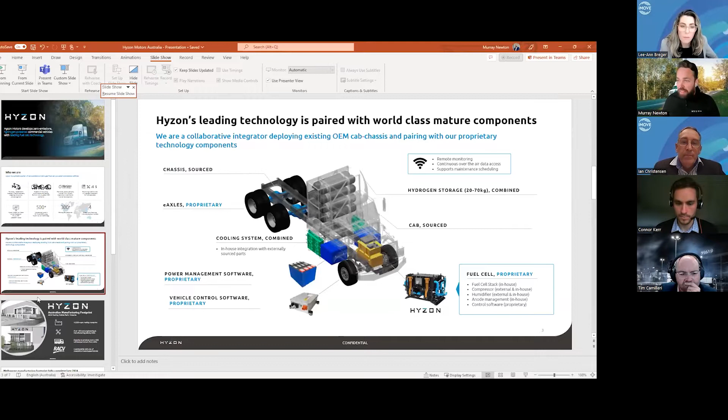Murray, sorry to interrupt, I don't think your slides are going through. I sent you a message but it doesn't seem to be advancing. Do you want to hop into full screen mode and go through? I will, sorry about that. Can you see that now? Yeah, that's going through now. Okay, so I can make the presentation available for people afterwards.

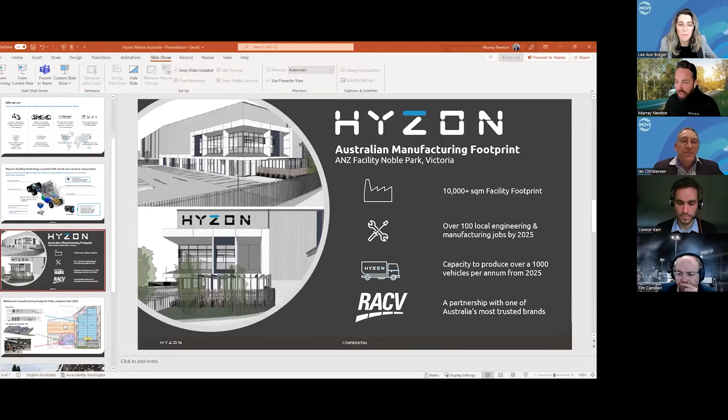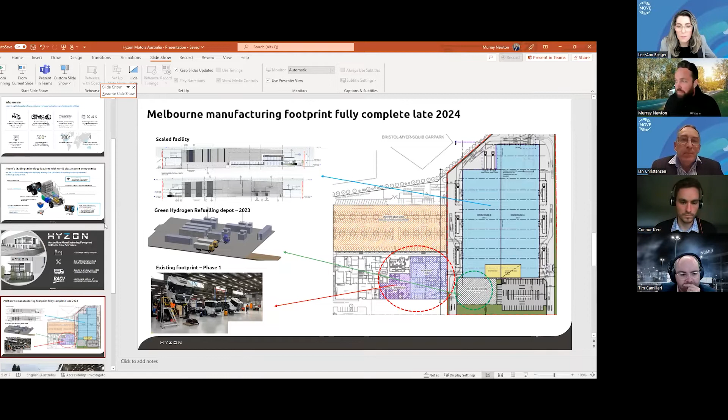As I did say, we have a manufacturing footprint here in Noble Park. This gives everyone an overview of the footprint and its various stages: the development of the green hydrogen refuelling depot we announced earlier on site, our existing phase 1 footprint we're operating out of currently, and the 10,000 square metre full facility at scale coming online towards the end of 2024, 2025.

A lot of people within the sector will see hydrogen players popping up and down, committing to things, but I wanted to share these images to show everyone we are real, we are operating locally. On the top left are our fuel cell electric coaches, part of our commercial arrangement with Fortescue Metals, to be delivered to the Pilbara by the end of the year. The other images show our Mercedes-Benz heavy rigid Econic platform under development currently in our Noble Park facility.

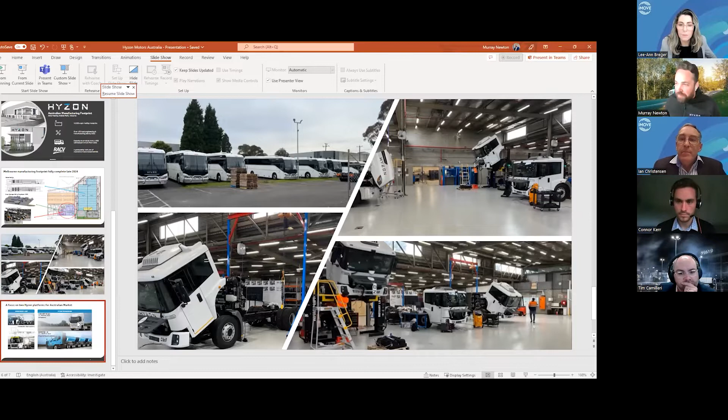I wanted to touch on our vehicle offer, because I'd imagine this is quite important to a number of people on this call. We're focused particularly on two platforms. We're basing our Australian operations on the Hyzon heavy rigid, based off the Mercedes-Benz Econic platform.

In this diagram, we're looking at garbage trucks, tilt tray, tow trucks, and concrete aggregates. We're basing the engineering and development of the integration of our software and powertrain into these platforms right here in Melbourne, which is a really exciting story. The Australian operation will form the basis of Hyzon's overall export of these vehicles overseas.

The top vehicle, our cab over, is being developed in Europe. These vehicles are also going to be delivered to some of our customers in New Zealand in the short term, and that's built off the DAF platform.

The vehicle on the bottom right is being designed and fitted in the US, and that will be our Freightliner, off the Freightliner Cascadia platform - our prime mover. That will form the basis of our heavy haulage development into road trains and line haul, which I know a number of people will be interested in as our technology develops and we have the appropriate power systems to function these vehicles.

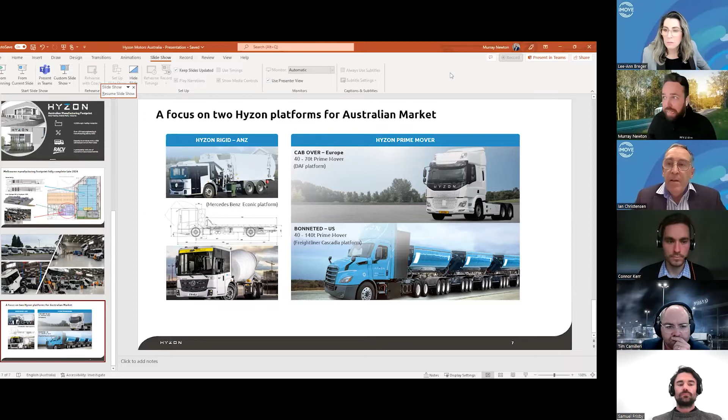Thanks, Murray, that's fantastic. Great to see some real trucks coming off the production line.

So the need for hydrogen trucks is present around the world, and so whilst Hyzon is proudly developing its trucks overseas and in Noble Park, others are also active in this space.

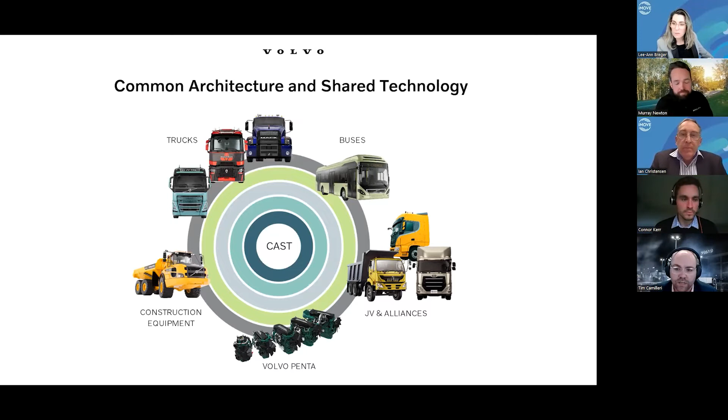So I talked about it at the start, but our journey starts with electric bus prototype in 2015. 2017 was full production of those all electric buses. 2019 was our medium duty trucks offering. And then moving forward from there - we've got some 5,000 electrics on the road. We've got a handful of hydrogens on the road in testing, but we're growing from there.

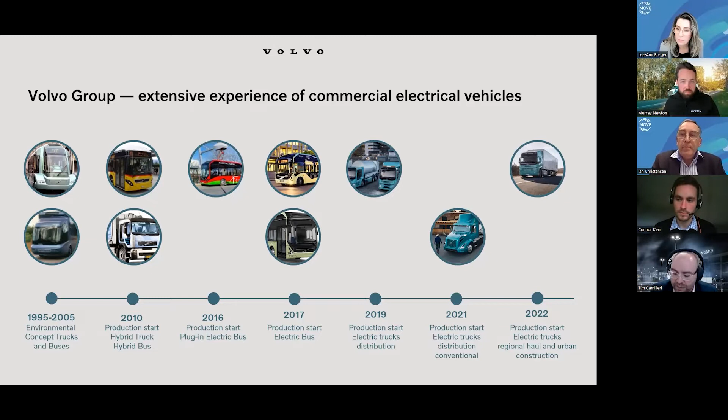So the way in which Volvo sees the market breakup when it comes to vehicle offerings is that there is a split between the electrics and hydrogen for us, and how we see the market. But where electric can do the job and can sustain enough energy or contain enough energy on board to do the job, whether it's a lower mileage or a higher energy use - if the electrics can do the job, then the electrics are sufficient for that. But having the ability to add hydrogen fuel cells and hydrogen storage onto a vehicle on top of that allows for either greater distances or greater energy usage of the vehicle.

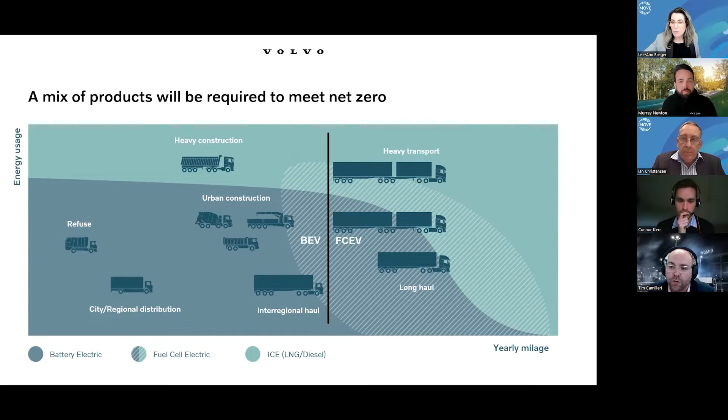How that looks overall for us: we have our electric vehicles and medium duty on the left hand side, our heavy duty in the middle, and our hydrogen on the far side. So the way we simplify it is a single trailer metro operation will probably be an electric product of ours. Anything not metro, or two trailers or more, is where our hydrogen will come online, allowing those further distances and greater weights.

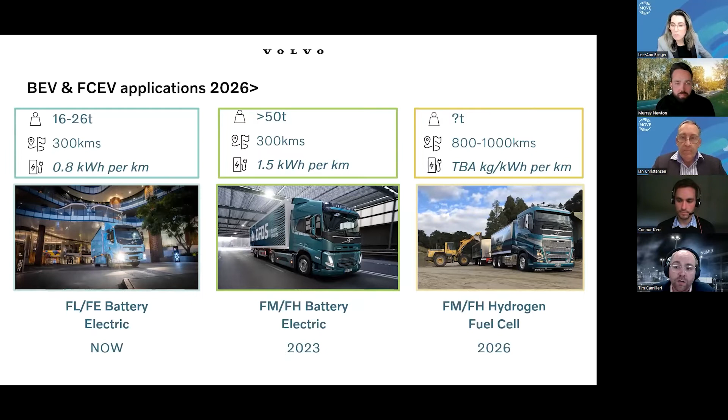So for us, a good bit about timeframes there, and I'll start to talk about why and how those timeframes really shape up for us in terms of how we're going about working on the hydrogen fuel cells.

For us, the three key pillars of Volvo are safety, quality, and environmental care. So when it comes to our products, safety is number one. As the inventors of the 3-point safety seatbelt, safety is always going to be a key part for us. The other side of things is having an ecosystem that goes around the vehicle. Part of my job is working to break down barriers to make sure these vehicles can come in. But overall, the vehicles have smart technology and software to simulate and calculate what these vehicles are doing, to make sure the right vehicles are put into the right use overall. That's the way we work, making sure we can put those vehicles into reliable and safe service.

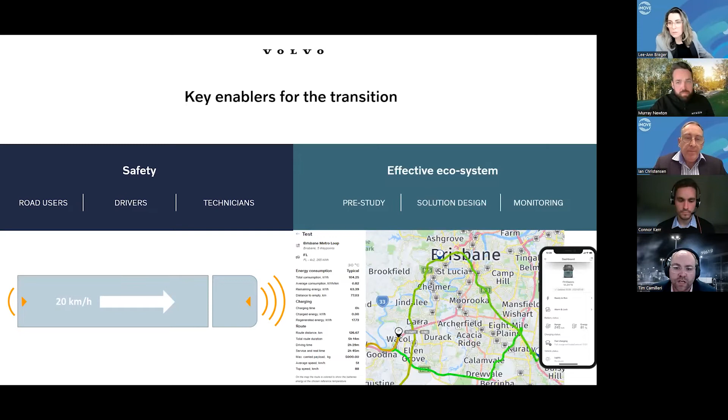Safety obviously never compromises, it's one of the three pillars of Volvo, and it involves training of the drivers. We have EV certified dealers around the nation, growing and coming online as we go forward. But the key part I want to talk about today is road users. The electric and hydrogen vehicles are so quiet.

They've been made so quiet we've actually had to add sound. So making sure those different noises with idling, speeding up, cruising, or reversing are all broadcast by the vehicle, to make sure it's about safety for everyone in and around the vehicles and their uses.

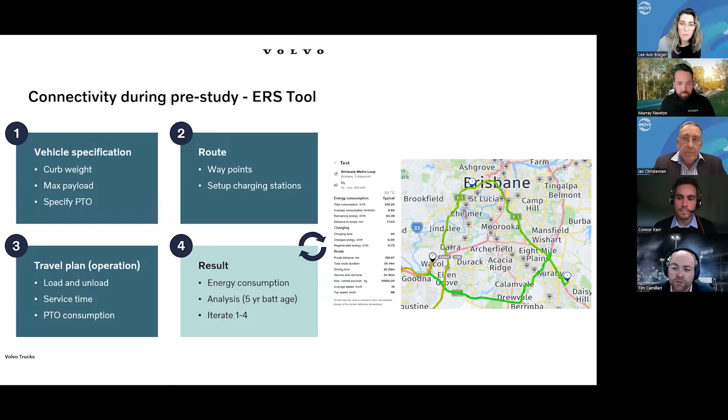On our tools, we work to break down the barriers and make the transition as easy as possible, looking to simulate all the different weights, what the vehicle looks like, what body's on it, energy uses, where it's going, what possibilities are for charging or refueling, and how it's being operated, to make sure we can put the right vehicle in the right use case overall. That breaking down comes with all our vehicles, both in a pre-study and what we do with the customer, and then handing it over to the customer for them to use and keep refining their operations.

The way we're going about our design and the engineering marvel that is the hydrogen fuel cell is in a joint venture with Daimler. So Volvo and Daimler at a global scale are working on it together, about halfway through a 5-year project now designing the hydrogen fuel cell componentry that we will share and then take into our own chassis packaging. It's going along quite well, starting to see a few move from bench testing to first test vehicle mules into full operational test vehicles now, which is quite rewarding to see overall.

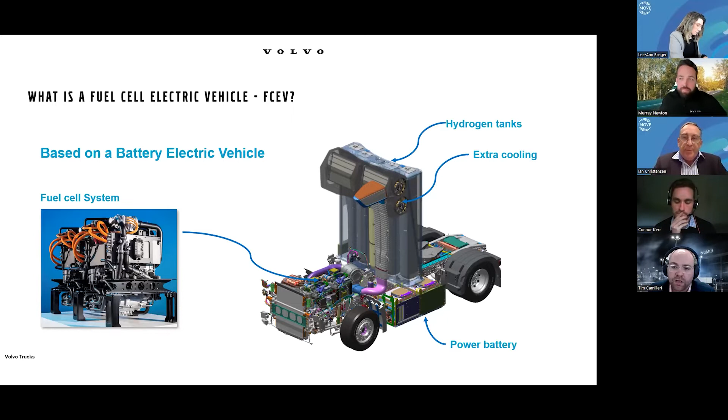I'll quickly cover this one, but the video will show it a lot better and smoother than I can. Overall, it's a battery vehicle with a hydrogen fuel cell, with the addition of hydrogen fuel tanks to fuel the fuel cell, and the additional cooling needed to make sure the vehicle operates and the process runs smoothly. We had test vehicles up and running - this was our first one based on our normal FH vehicle. You can see the stacks at the back there in the darker blue. At the moment it's in single trailer operation, but we're looking to move forward into 2-trailer operation.

I have one video for a minute to show, explaining, I guess, what Murray and I tried to so eloquently put together, but I find the videos do it a lot better for us. Sorry, Murray.

I hope that sound's coming through. I don't think there's any sound on that one, Tim. Oh well, I'll share a link, but the words are there. It's got captions though, so.

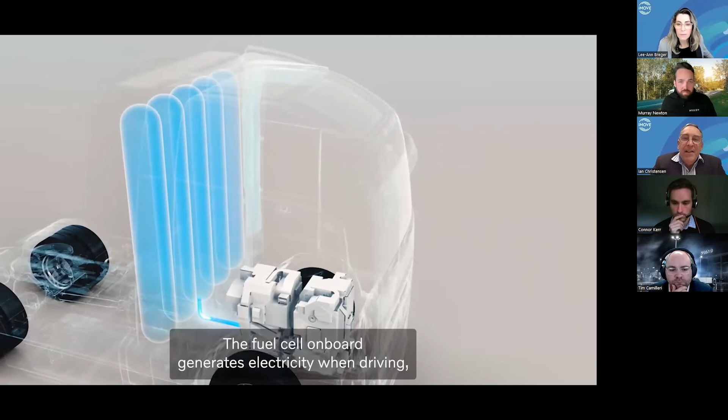As I said, regardless of the vehicle, Volvo or Hyzon, what's coming up the top of that vehicle is steam, just water. Yes, it looks like an emitter, but no, it is just H2O. So overall, it is a much better vehicle for the environment overall.

The last part I want to touch on before passing it to the other presenters is that the Volvo group overall is taking on responsibility for circularity, making sure all the components as much as possible, whether it's the membranes and the fuel cells, but more specifically the batteries, live a multitude of lives. So they come out of the vehicle and go to stationary storage, with a plug-and-play solution provided by Volvo to continue the life of those batteries and minerals going forward, while also working to ensure the recyclability of our batteries is very high, so we're not losing too many minerals or energy as they go into a new manufactured life.

So keeping that circularity, it is sustainable from two factors: environmental and financial. It's not just a battery for the life of a truck of 5 to 8, 10 years, whatever it is, but it lives on from there and gets true value out of that battery as it moves forward. So, that's the last one, thank you very much. I'll hand back to Ian and await the Q&A at the end. Thank you very much, appreciate it.

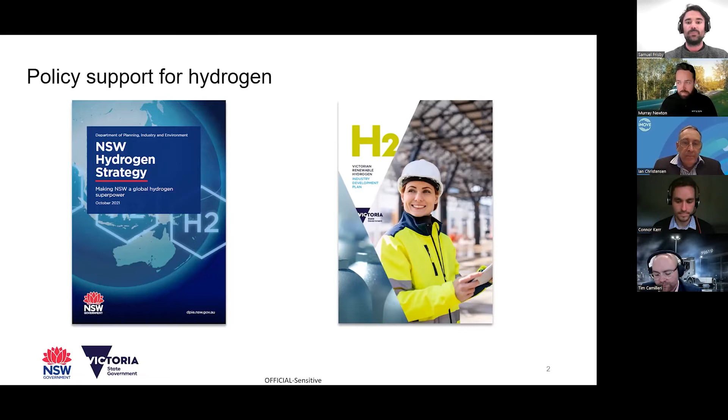A key outcome of the plan, which is the catalyst for this program, is advancing the integration of renewable hydrogen with the transport sector. We recognise hydrogen can provide a zero-emission solution deployable across a number of transport modes, particularly heavy-duty vehicles, to help drive decarbonisation of this emissions-intense sector. The Hume Hydrogen Highway initiative will help deliver on that outcome and more broadly supports implementation of our plan.

Through the MOU, we've agreed to work collaboratively and share knowledge from our learnings on the Hume Hydrogen Highway initiative, hopefully using those learnings to inform future policy and development of this East Coast network. In particular, this includes exploring additional hydrogen refueling corridors along the Pacific and Newell highways that link Melbourne all the way through to Brisbane in the later part of this decade.

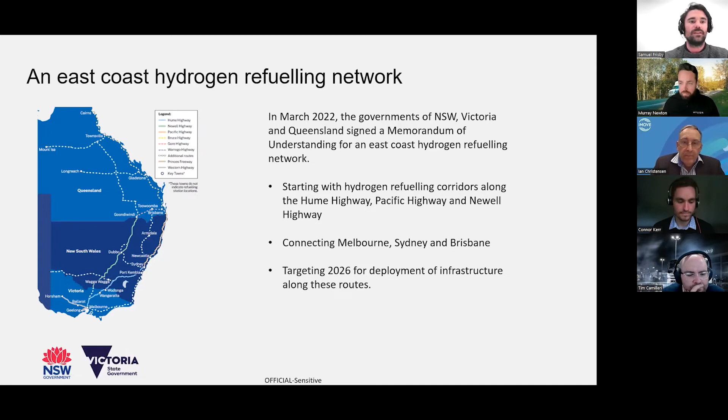Now diving into more detail about the HHH, as we like to call it. In December 2021, New South Wales and Victoria signed another MOU very specific to the HHH, focused on co-designing, co-funding and co-delivering a program that deployed a hydrogen refueling network, first of its kind in Australia along the Hume Highway.

A key part of that program funding is recognising the chicken-and-egg cycle, that there needs to be funding support for both sides of the equation, ensuring we can fund refueling stations and hydrogen-powered trucks to use the network. The heavy transport industry powers both New South Wales and Victoria's economies, and it's also one of our largest sources of greenhouse gas emissions, so we recognise this as a great opportunity for the state governments to work together on this challenge and come up with a solution.

It's within that context that the $20 million Hume Hydrogen Highway initiative originated, aiming to support the establishment of a network along the nation's busiest freight corridor between Sydney and Melbourne. The aim is for the refueling corridor to reduce carbon emissions, improve air quality and reduce vehicle noise on our roads, grow and diversify the economy by creating new jobs, and catalyse further public and private investment into hydrogen refueling infrastructure to help establish an East Coast refueling network.

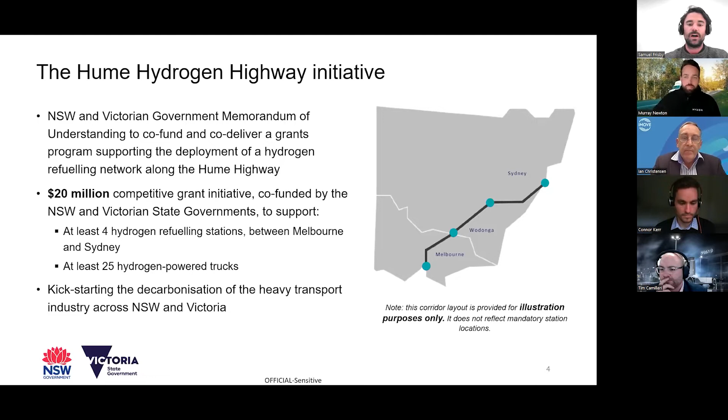The initiative has the following objectives: to accelerate development of a renewable hydrogen economy in New South Wales and Victoria, promoting decarbonisation of the transport sector and supporting reduction of greenhouse gas emissions in both states; promoting the heavy transport sector as a key offtake for renewable hydrogen; building foundational local knowledge, skills, infrastructure and supply chains to drive large-scale market activation; leveraging match funding to create new jobs and capital investment in both states; and generating and sharing knowledge that demonstrates a repeatable and scalable commercial model for hydrogen refueling.

We're hoping that last objective is all about how we take the Hume model and roll it out to other key freight corridors that link our states. I'll now pass back to Connor to dive into more detail on the initiative and things for potential applicants to be aware of.

So yeah, the Hume Hydrogen Highway initiative is a competitive grant program. It's open to all market participants. We've published on the initiative website a clear set of guidance in the form of application guidelines, so that they really talk through all the content that we've talked to today and more.

And to achieve those objectives that Sam just ran through before, we're strongly encouraging potential applicants to apply or consider applying as a consortium, with one organisation taking the role of a lead applicant or a prime. We anticipate that consortia will be needed and that it'll need to be comprised of numerous market participants, comprising the necessary capabilities and capacity to meet our objectives and our project parameters.

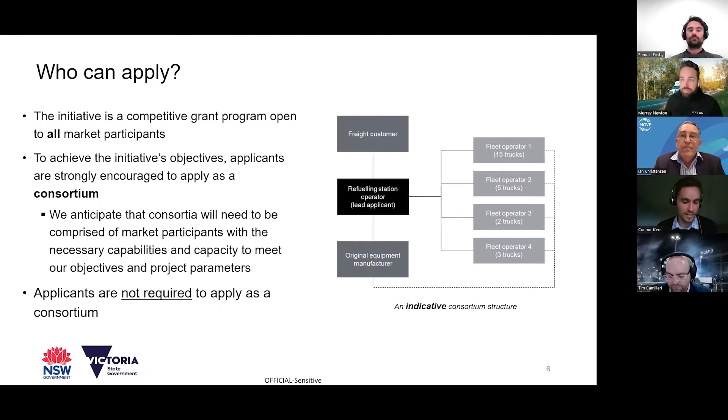And so that figure on the right here is just provided as an example, just noting that applicants can propose alternative arrangements that still support our initiative objectives.

In terms of what we're looking for in projects, there are 8 key project parameters, and these are thoroughly described in section 4 of our application guidelines. I'll quickly just run through them now, but as I mentioned before, the guidelines talk through all these in thorough detail. So the first one is the hydrogen refueling station parameter, and this outlines that proposals must include a minimum

of 2 open access stations in both New South Wales and Victoria to provide full coverage of the Hume Highway for hydrogen powered trucks travelling both north and south. In terms of the hydrogen trucks, we've outlined that proposals should include at least 25 hydrogen powered trucks, with higher merit proposals demonstrating higher emissions reduction potential in those vehicles.

In terms of refueling capacity, that parameter requires that proposals must ensure there will be sufficient refueling capacity for heavy vehicles along the corridor. So we're looking for people to demonstrate how that refueling capacity of each station cumulatively provides a full coverage of the Sydney to Melbourne corridor.

In terms of supplying those stations, what we've required is that it's renewable hydrogen, and it's the only colour of hydrogen that's permitted under this initiative. That renewable hydrogen can be sourced through either hydrogen supply agreements, or it can be sourced from on-site hydrogen generation at the stations.

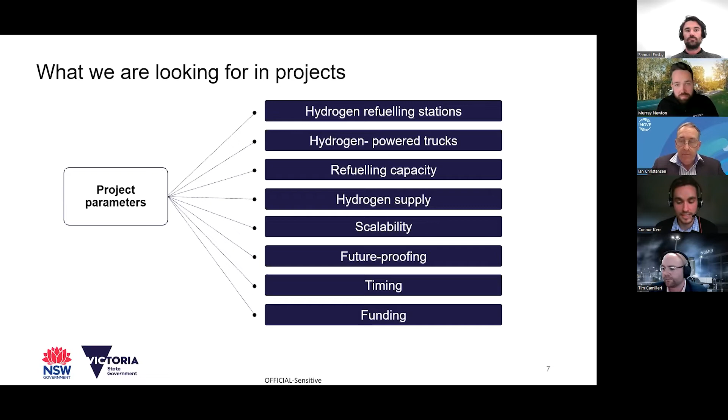And in terms of timing, we're looking for the Hume Hydrogen Highway, the Triple H, to be operational by the middle of 2025. And just the last point is regards in terms of funding. So the $20 million program sees New South Wales and Victoria both committing $10 million each. And we're looking to match funding from industry up to a maximum of 50% of the project's eligible expenditure.

In terms of the key dates for industry to be aware of for the Triple H program, we've opened for applications on the 18th of July, and that application period will close at 2 p.m. on the 28th of October in a couple of months' time.

After the applications close, we'll then move into an assessment period and then seek approvals for the grant award at the beginning of next year. So we're targeting for the successful applicants and unsuccessful applicants to be notified in around February of next year. That will allow us to then execute a funding agreement with the successful applicant and keeps us on track for the HHH to be operational around the middle of the decade.

Lastly, I'll just pass back over to Sam, who will just run through the useful contacts for the initiative and where you can find further information.

Thanks, Connor. So we've got a couple of email addresses. The most important one is hydrogen@planning.newsouthwales.gov.au. That's the email address for any questions regarding the initiative, application guidelines, or assessment process. We encourage you, if you have any questions today that we can't answer in the Q&A, to jump on that email address and send them through.

The second email, grantsinfo@delp.vic.gov.au, is very specific to the actual online application portal and difficulties with submission.